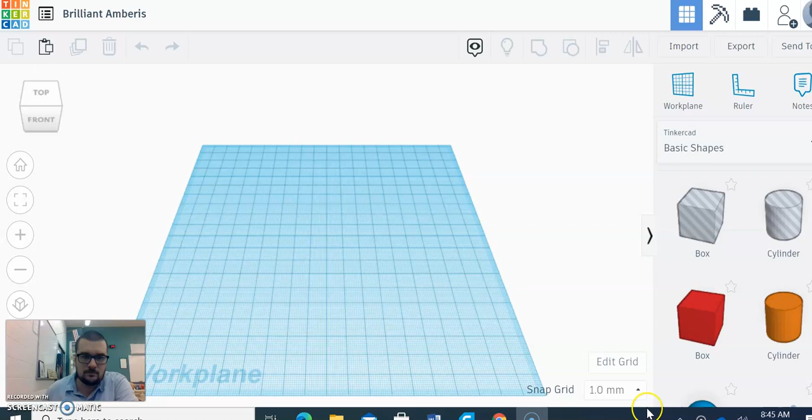Hello everyone, so we are going to be designing 50-cent coins this week.

The first thing you want to do is click into the file name and put your last name and the coin project. I'll just say 31 because I've done so many.

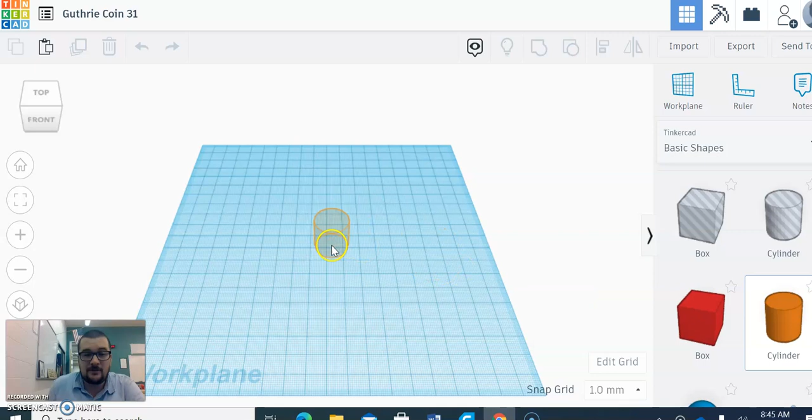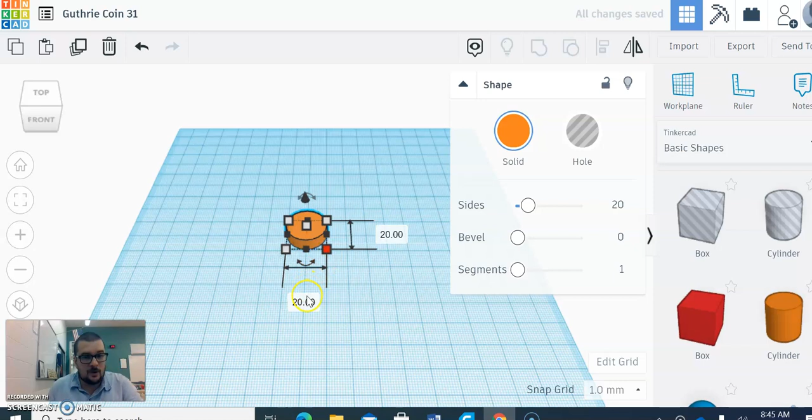Then we are going to start with a cylinder. If you want to do a different shape, that's fine. Generally we do cylinder, but I encourage you guys to change things up and make it unique. We're going to make it 6 millimeters height at least, and length and width we're going to do 40 and 40. So we've got the size.

Then we have to add a design to each side of the coin, and then you are done. You can do all kinds of things. I'm going to keep this simple, so let's say I'm going to do a star on one side.

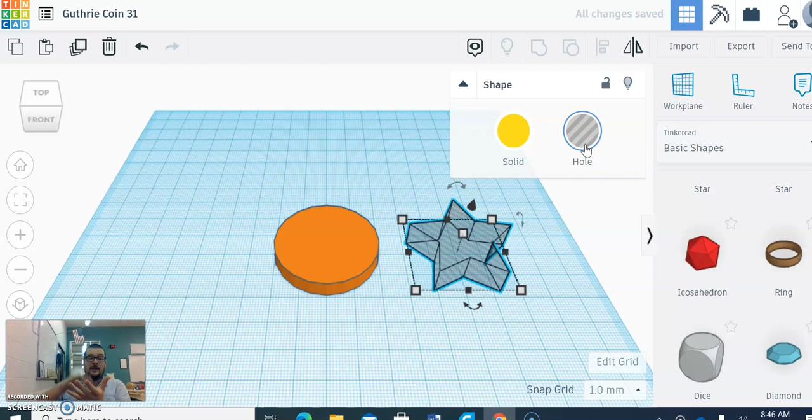First, we're going to have to make it hollow because we're going to be using this to make an impression in the coin. So we're going to have to take part of this cylinder out.

I'm going to make this 3 millimeters with height. And then, the key here, very important, is to lift it up 4 millimeters. If we do that for both designs, there will not be a hole in the center of your coin, because if you don't lift it up enough, the designs will mesh together and you'll just have this weird looking coin with some holes in it.

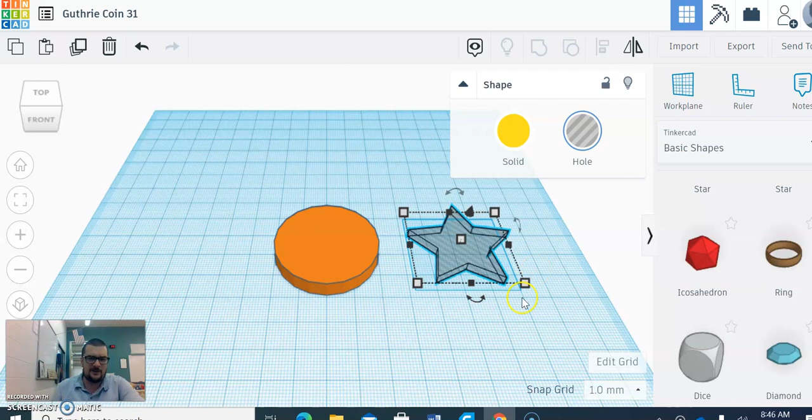So then we're going to slide the star into the coin. Now it seems a little big, so I'm going to make it a little bit smaller, and then I'm going to use align here to center it, which you don't have to have it centered. You could have it differently, or you could have a bunch of small stars.

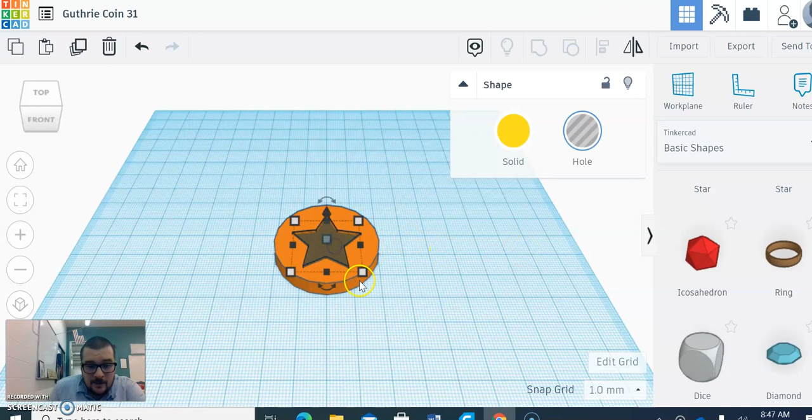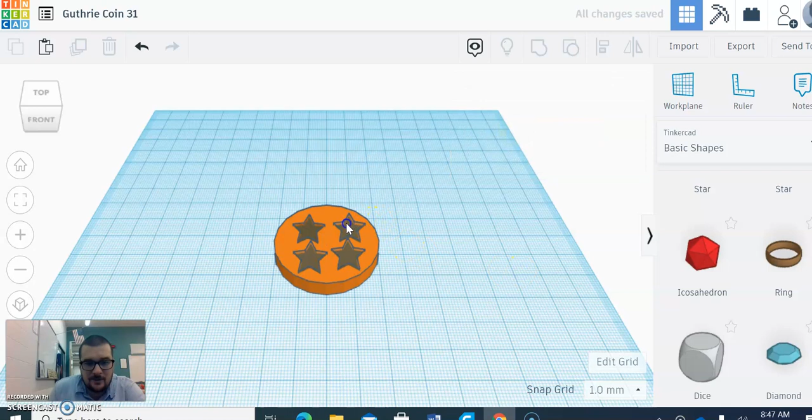Let's say I wanted to do 4 stars. Go back. Something like that you could do. And then I'm going to group this together, so they are in there.

Now the most important part, because if you do this wrong, it is going to mess up your whole design. I've had kids say they understand and they still don't seem to grasp what we're doing. So we have to flip the coin over 90 degrees so it's on the bottom, completely flipping it over. We can either do it like this, slide it through the inside set of lines till you get to 180 degrees, not 90, I can't believe I said that.

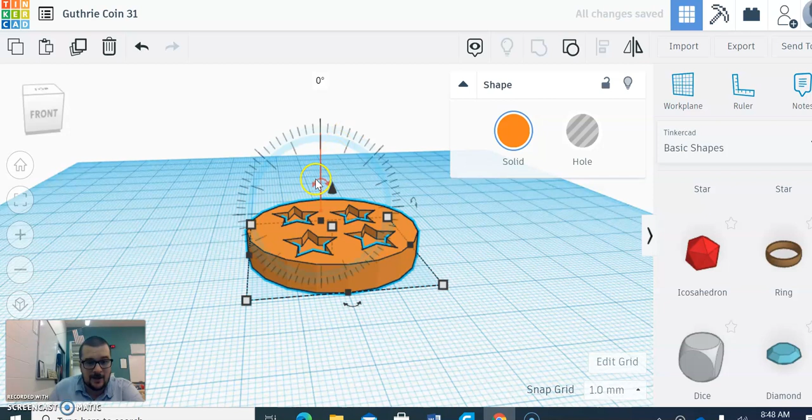So there's that way of doing it, or you can tap the arrows, rotate, and then click into the degree and just type in 180, and it'll flip it over. That way it's completely flat with the ground. Many kids will accidentally be off by 1 degree, and that angle is enough where it has to fill that space in here with support pieces, and your design is just going to be a big mess.

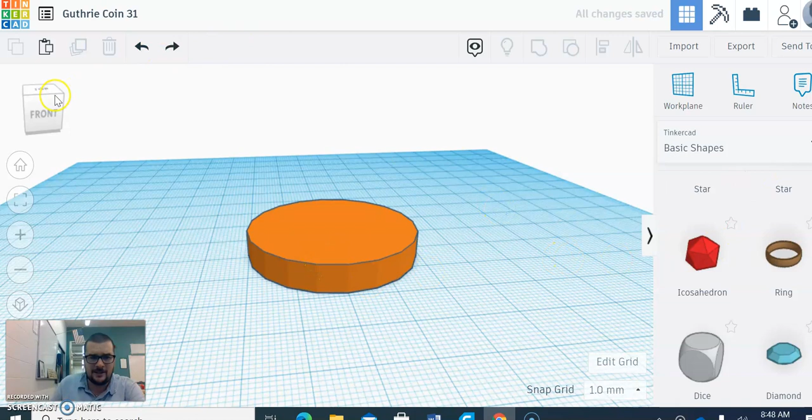So we're on the back now. You can do all kinds of things for this, as long as it's school appropriate. If you want to get really crazy, I might have to help you with this.

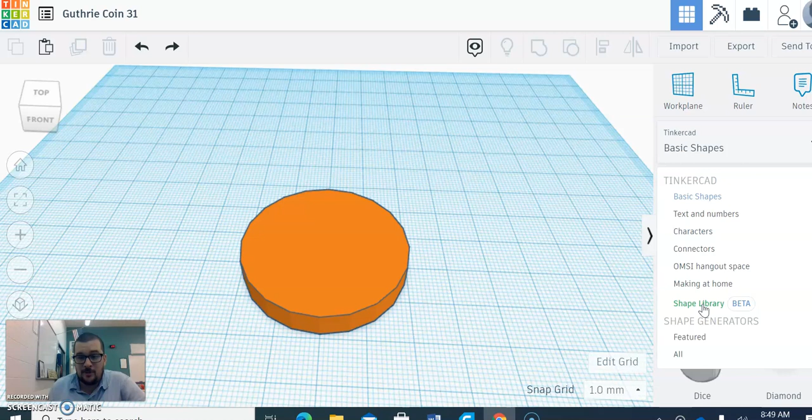So there's a shape library here, it's beta, so not everybody has access to it. If there is a design in there you see when I'm about to show you that you want, I can drop it into your file if you let me know. You gotta let me know pretty early on in the week so I can have a chance to get to it. So I'm going to click shape library.

I can ignore a lot of that stuff. Is this it? No, I don't think we're in the right one. Yeah, this isn't it. We want... nope, not here. Where's the good stuff? There we go, here's some of the good stuff.

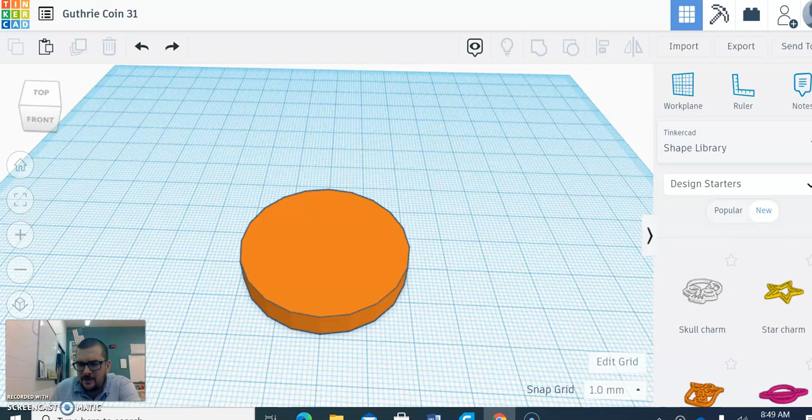So we got the thundercloud, the star, the skull, the planet. There's a snowflake somewhere, everybody loves the snowflake. There's a snowflake. So if you want a snowflake, or the action charm, or the astro charm, or the robot, let me know, and I can drop it into your Tinkercad for you. So I'm going to go with snowflake.

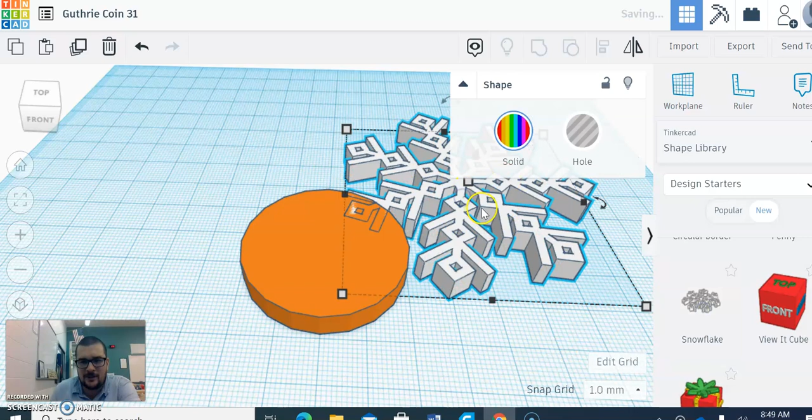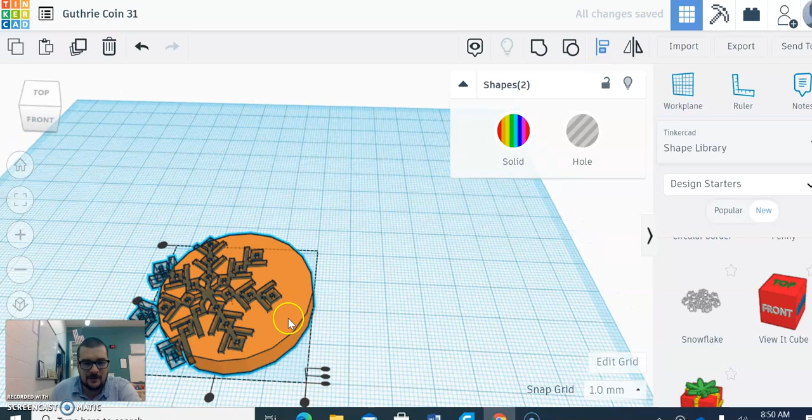Same thing, I'm going to make it 3 millimeters tall. I'm going to lift it up 4 millimeters high. I'm going to make it a hole, and then I'm going to size it down to fit into the coin. Close, I did. Yeah, pretty close, make it a little bit smaller.

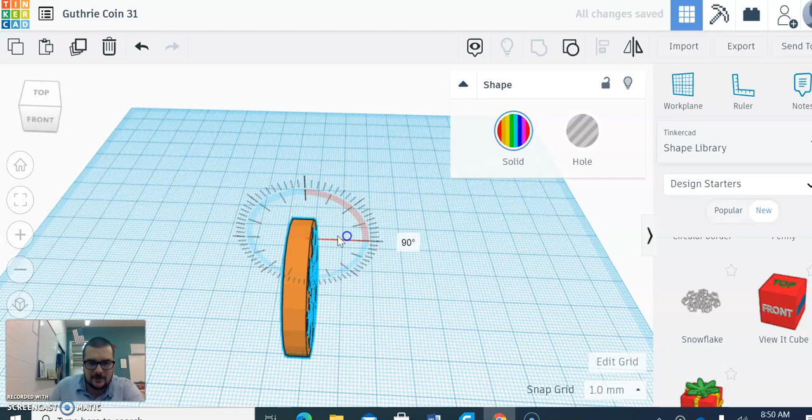There we go, and I'm going to group it together. I'm going to put that impression in there. And there you go, I'm going to flip it over just so we can look at it. So there you go, that's all there is to it.

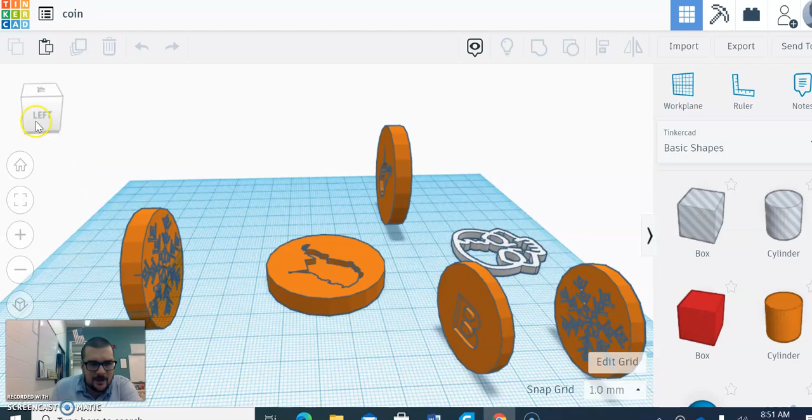I'm going to show you a couple other ones I've done in the past real quick just for some inspiration. All right, here's a bunch. So we got a couple state coins and some letters, skull, heart.

So there's all kinds of stuff. Not sure what that one is, but it's Ohio.